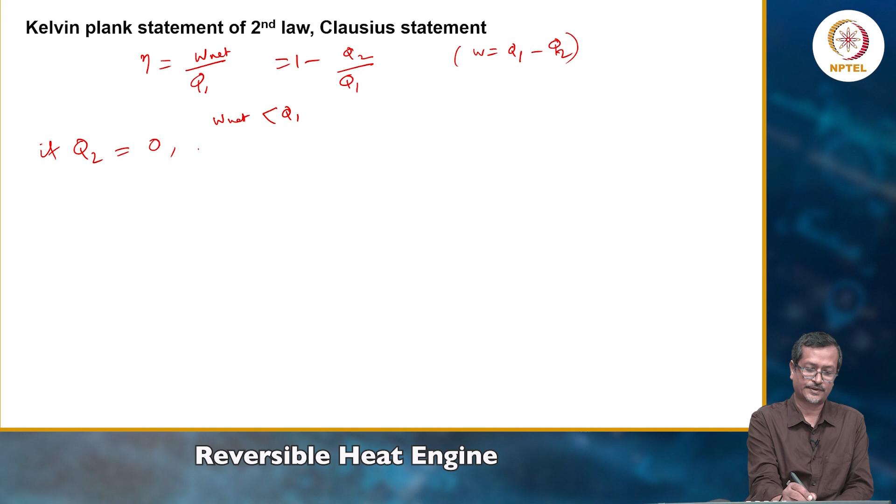So W net is less than Q1. If Q2 equals 0, that is W net equals Q1, that means eta equals 1. So heat energy will produce work violating Kelvin Planck's law. There must be some heat transferred to sink. If there is no heat transfer to sink, that means it is violating Kelvin Planck's statement.

Perpetual motion machine of second kind, PMM2. A PMM2 is impossible, coming from the second law. If the engine exchanges heat with only a single thermal reservoir, only source is there, no sink, then heat supplied is completely converted into an equivalent amount of work. Source, system, sink, and you are getting work. So perpetual motion machine second kind says there is no sink, only source, and work output is there. This is impossible. This kind of machine is known as PMM2.

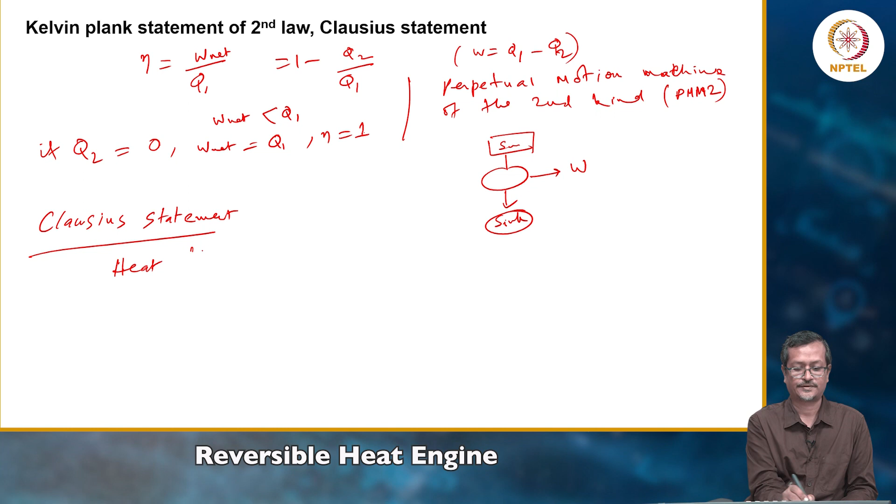Clausius statement: heat always flows from a body at higher temperature to a body at lower temperature. The reverse process never occurs in a system. So Clausius statement: heat flows from higher temperature to lower temperature body, and the reverse flow cannot occur.

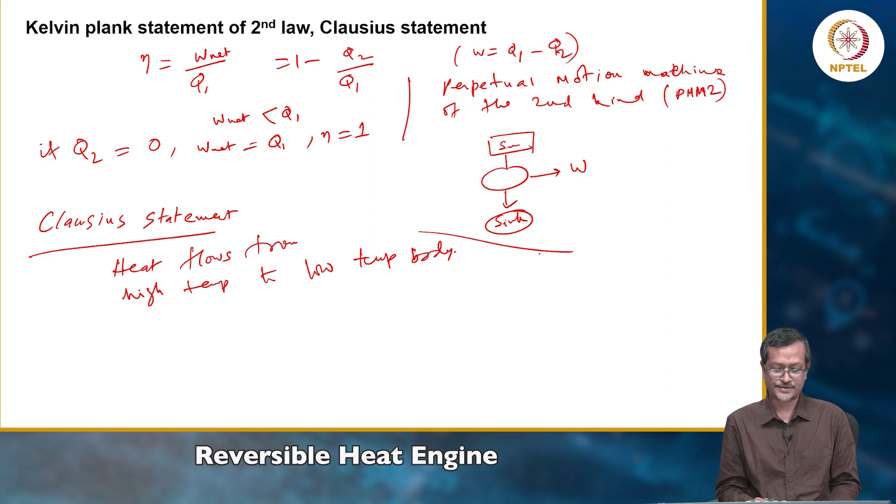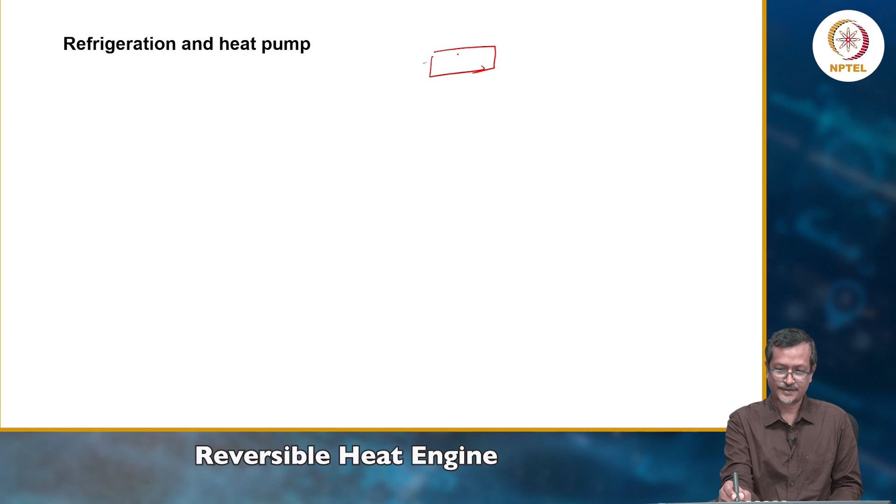Refrigeration and heat pump. First you draw one refrigeration cycle. Details I will discuss later when teaching the refrigeration part. So there will be one compression system, then there will be one evaporator system.

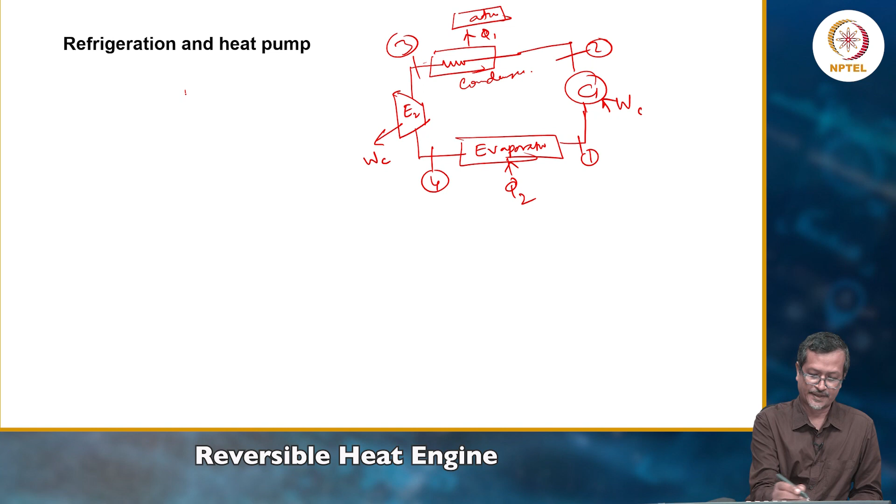This is the compressor we are giving, expander, work coming out, atmosphere, and heat is going to the atmosphere, Q1, evaporator taking T, Q2, this is 1, this is 2, this is 3, this is 4, this is condenser. Our cycle is happening like this: atmosphere, I have one cycle, then I have body A at T2. Q1 is flowing here, Q2 is flowing here, and WE is going out, WC is going in, and the whole cycle is going on.

If I represent it: E, work is going out, C, work is in, and atmosphere, heat is going out, and from the evaporator heat is entering the system. It is just the opposite of your steam cycle. In the steam cycle there was a condenser where heat was going out, a turbine, and a boiler system. So this is just the reverse of your steam engine cycle.

So coefficient of performance, COP. COP is defined as COP equals desired effect divided by work input, equals Q2 divided by W, equals Q2 divided by Q1 minus Q2.

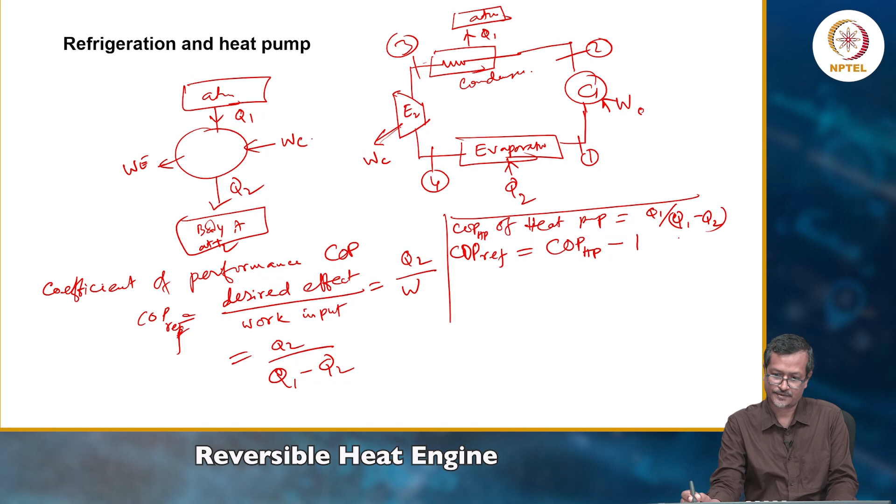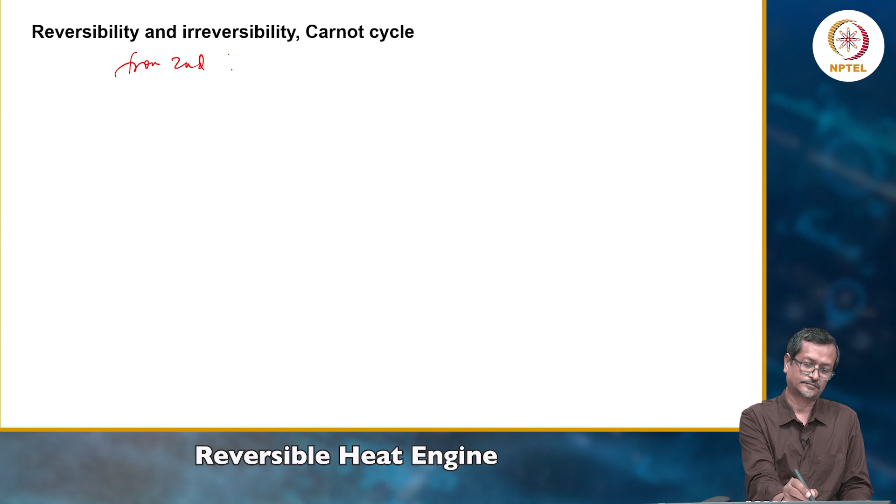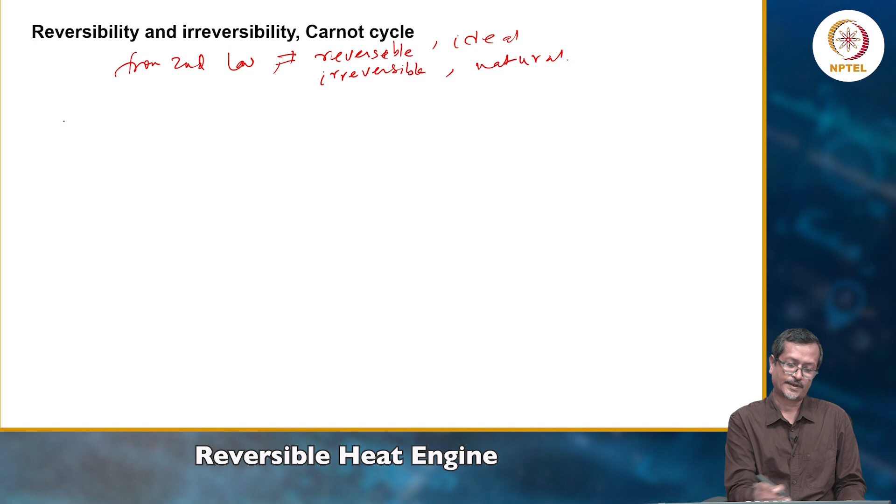Reversibility and irreversibility, Carnot cycle. From the second law, all processes come under reversible ideal process and irreversible natural process. Carnot cycle is a reversible cycle. A reversible cycle is an ideal hypothetical cycle in which all the processes constituting the cycle are reversible. First you draw one piston cylinder arrangement.

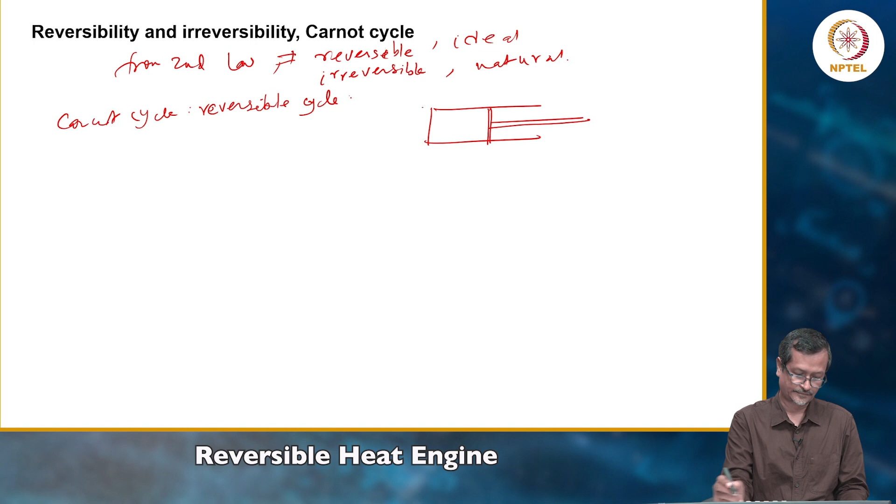Here, this is the diathermic cover, and this is the adiabatic wall. Adiabatic means no heat transfer is allowed, even mass transfer is not allowed. So no heat transfer or energy transfer is allowed. This is piston work, WP out, and the diathermic wall allows heat transfer. Diathermic cover means it allows heat transfer, HT means heat transfer, but not matter. And this is the adiabatic cover.

Source Q1 is going there, and sink T2, Q2. So this is the Carnot engine stationary system.

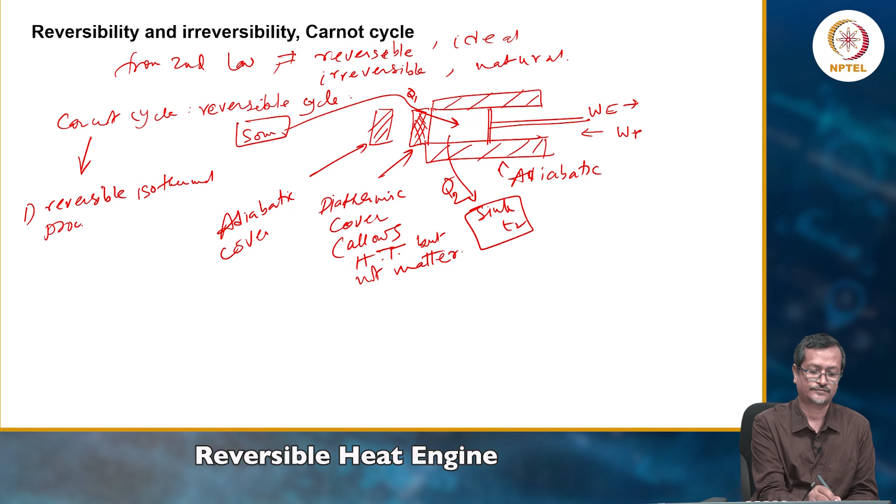The Carnot cycle will have a reversible isothermal process, where from first law it will be Q1 equals U2 minus U1 plus W1 to 2. This is called from first law.

WE is the work done by the system adiabatically. So the first law says 0 equals U3 minus U2 plus W23. So this is the formula W23.

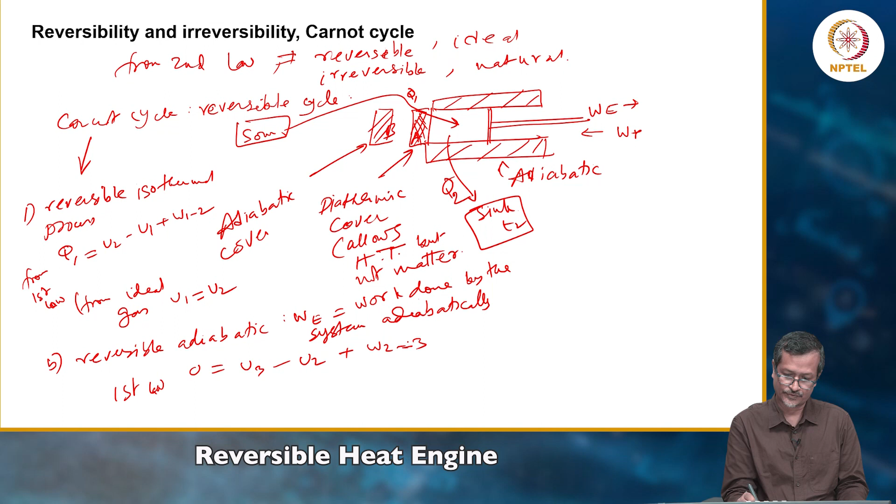A reversible isothermal process, again from first law, it is coming like Q2 equals U4 minus U3, W34.

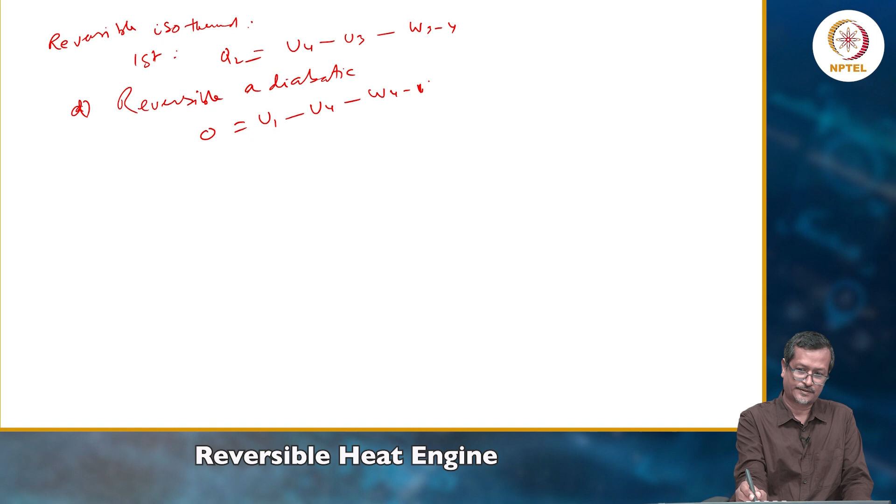This is D, reversible adiabatic process: 0 equals U1 minus U4 minus W41. So we are getting two reversible isothermal and two reversible adiabatic processes.

If I want to plot here, it will be like this, P versus V. So 1, 2, 3, 4 process like this: WP, WE, Q1 and Q2. So I can write 4 to 1, this is reversible adiabatic.

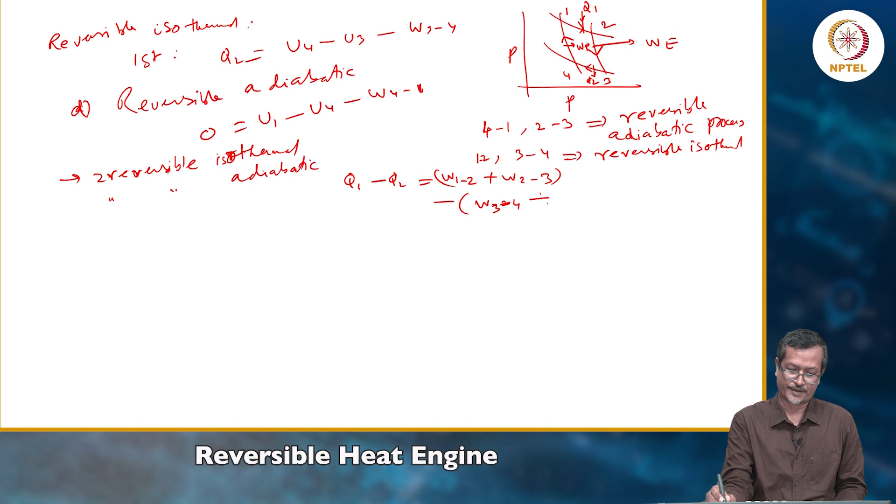1 to 2 and 3 to 4 are reversible isothermal process. So Q1 minus Q2 equals W1 to 2 plus W2 to 3 minus W3 to 4 plus W4 to 1, or summation of Q net cycle equals summation of W net cycle.

A cyclic heat engine operating on the Carnot cycle is called a Carnot heat engine.

Again, in the heat engine, T1 here it is coming as a compression system. So pump or compressor power is giving, and from here turbine WT is coming. This is T1, this is T2 will be coming here, T2, and the cycle will be like this. So continuous flow will be going on.

So pump D, turbine B, this is source is here. So from here Q1 is coming, and T2 sink, Q2 going, temperature T2 sink temperature, this is 4, this is 1, this is 2, this is 3, and fluid is flowing like this. So W net equals WT minus WP equals Q1 minus Q2. This is the Carnot heat engine, a steady flow system.

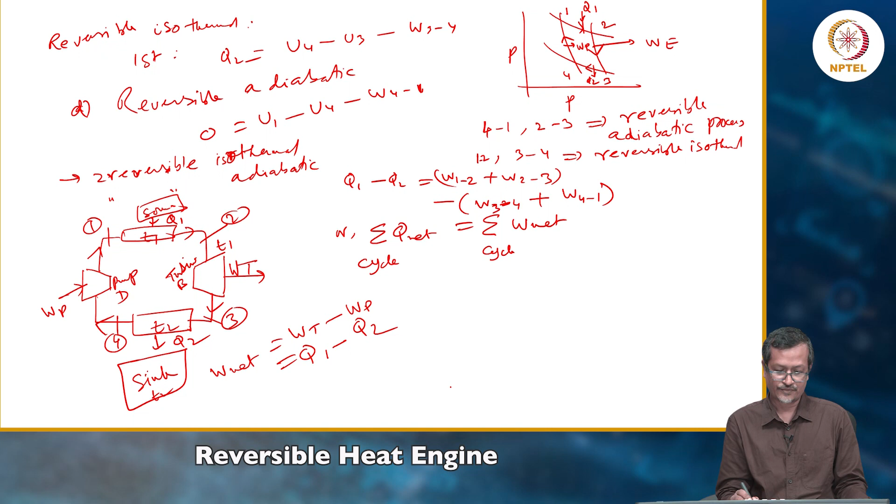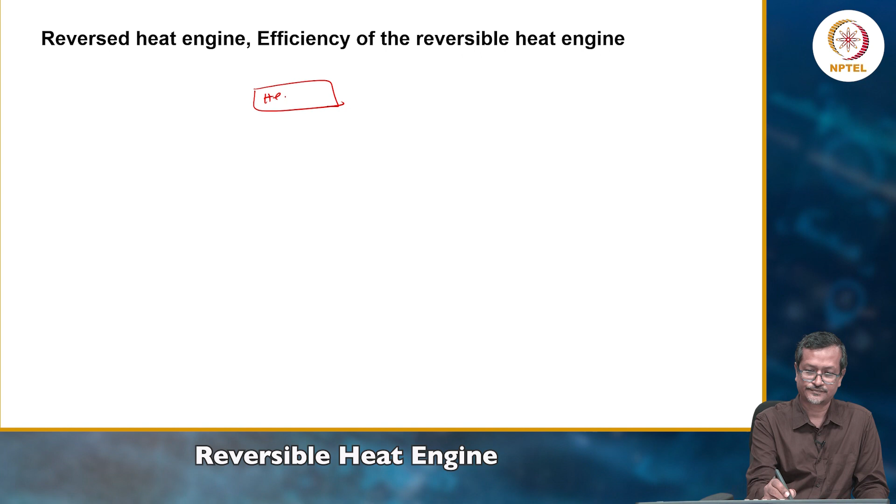So for the reverse heat engine, if I want to draw, first again you draw a heat exchanger. I will discuss details about heat exchanger later. Heat exchanger means it will be releasing heat from the system, or it will be getting heat.

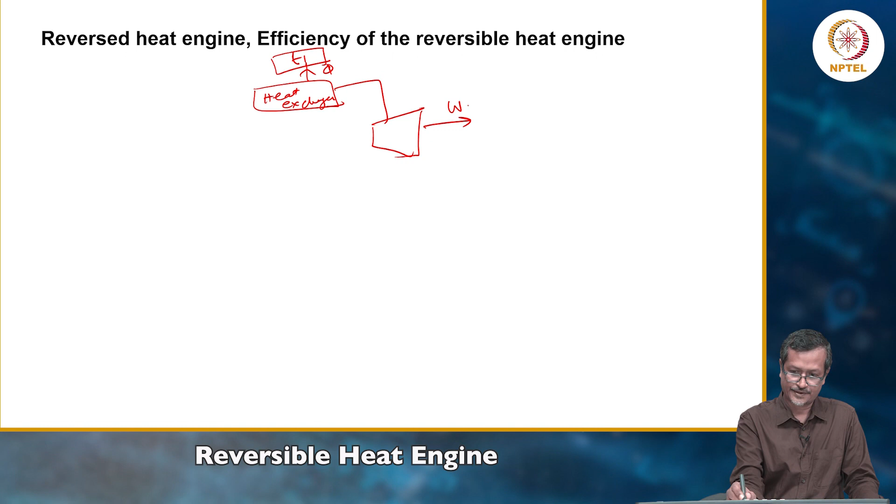So this is T1 and Q1, again turbine is here. So W turbine going out and fluid is flowing like this, and T2 is here, and this cycle again, the same similar cycle I am drawing here. So pump...

When you are talking about refrigeration, or when you are talking about heat engine, like a thermal power plant, the case will be just opposite. Q2, T2, from T2 you are taking heat and you are supplying the system, but in the other case it was just opposite. So the reversed heat engine is called the refrigeration cycle.

So the efficiency of the reversible heat engine, eta reversible, equals eta maximum possible. Carnot engine will be giving maximum efficiency. No engine can have more efficiency than Carnot efficiency: 1 minus Q2 by Q1 reversible.

If it is irreversible, then there will be much more losses: 1 minus T2 by T1, so eta reversible equals T1 minus T2 divided by T1. So this is the formula.

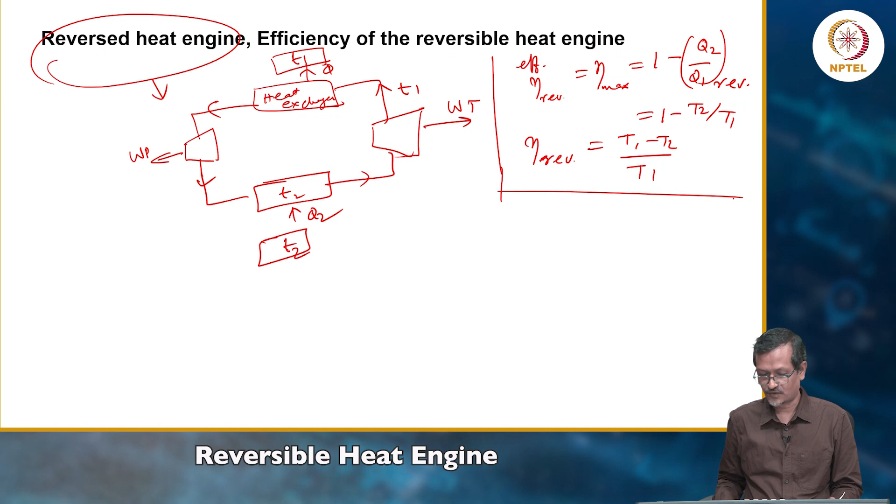So Carnot engine will have the highest efficiency. You cannot get more efficiency than the Carnot cycle. Other practical systems will have lesser efficiency because there will be several other losses. Carnot cycle assumes everything is reversible. So the entropy concept is coming from the second law.

So thermodynamics is the study of three E's: energy, equilibrium, and entropy.

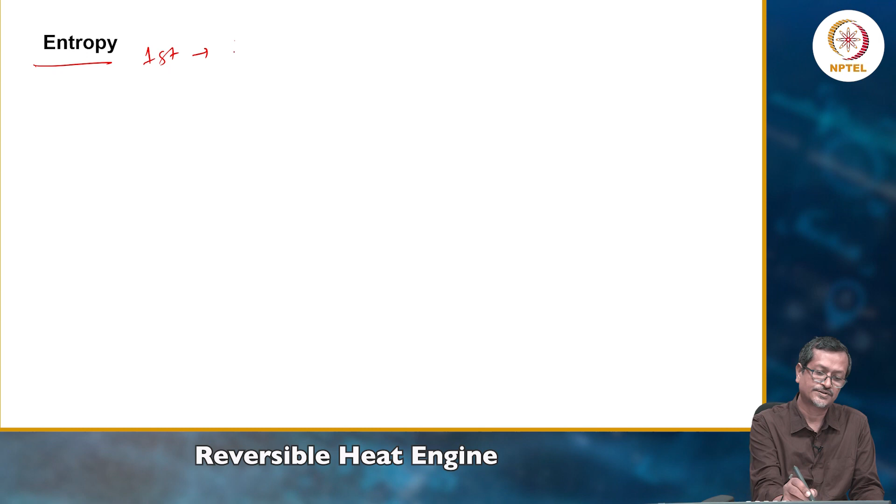First law says law of internal energy. Second law is the entropy concept; it will give, because it will say losses. So when losses are there, entropy will be increasing.

So property of entropy: let us say PV diagram, and two processes are there, initial stage, final stage, R1 reversible, and going back to I again, R2. So two reversible paths R1, R2 between two equilibrium states I and F. From Clausius theorem, R1 reversible process,

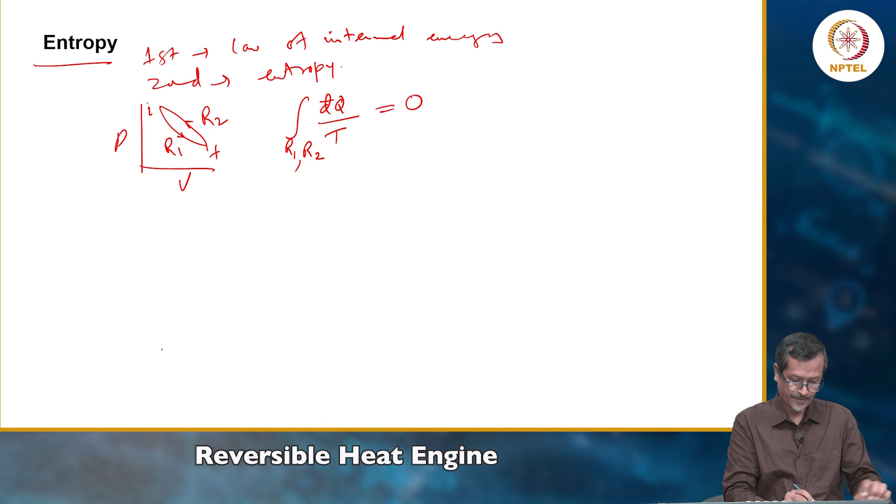dq by T equals 0. This can be replaced by integrating R1 I to F dq by T, plus dq by T for R2 F to I, because it's a cyclic process, equals 0. Or I can write integration of dq by T, I to F along R1, equals minus dq by T along R2, F to I.

Since R2 is reversible, I to F should be F to I. Since R2 is reversible, R1 I to F dq by T equals R2 I to F dq by T.

This property is called entropy. So SF minus SI equals integral I to F dq by T, or dS equals dq reversible by T, when two equilibrium states are infinitesimally near.

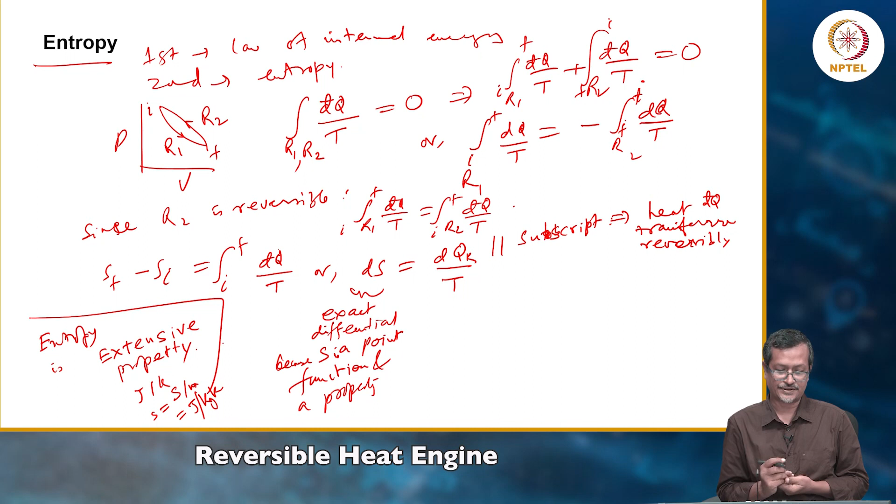Now we will solve two problems. Problem 6: the cyclic heat engine operates between a source temperature of 800 degrees and sink temperature of 30 degrees. The least rate of heat rejection per kilowatt net output of the engine is to be found.

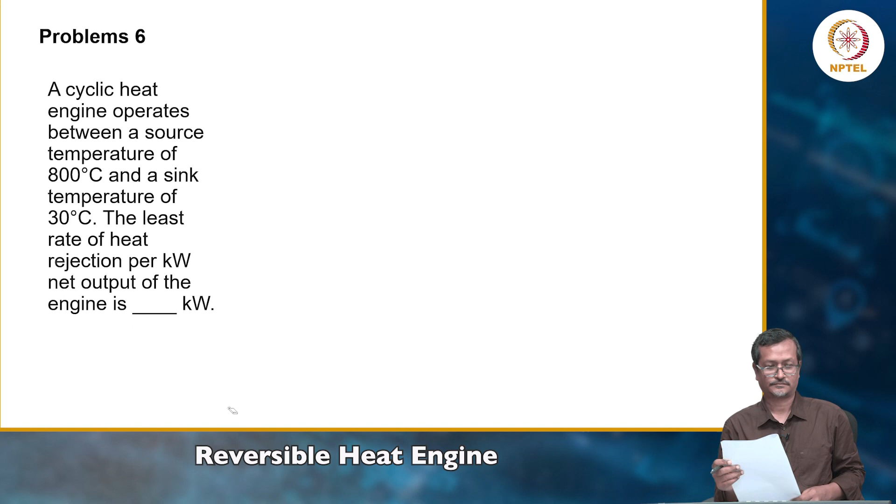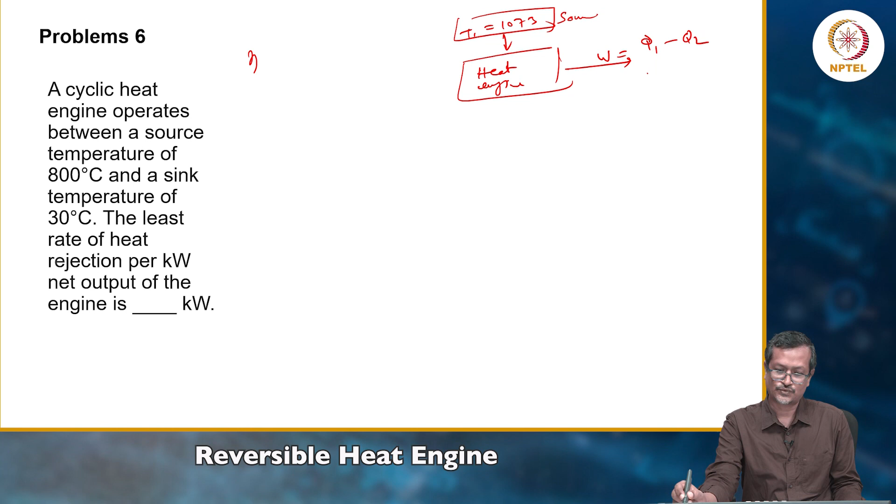So eta max, first you draw the figure of the heat engine. T1 equals 1073, this is source. And W equals Q1 minus Q2, 1 kilowatt, and Q2 is sink, T2 equals 303 Kelvin.

Now eta max equals eta reversible process equals 1 minus T2 by T1. So 1 minus (30 plus 273) by (800 plus 273) equals 0.718. So 71%, 72% efficiency.

Now net work output by input heat equals eta max. Q1 equals 1 by 0.718 equals 1.392 kilowatt. So Q2 equals Q1 minus W net equals 1.392 minus 1 equals 0.392 kilowatt. So this is the least rate of heat rejection.

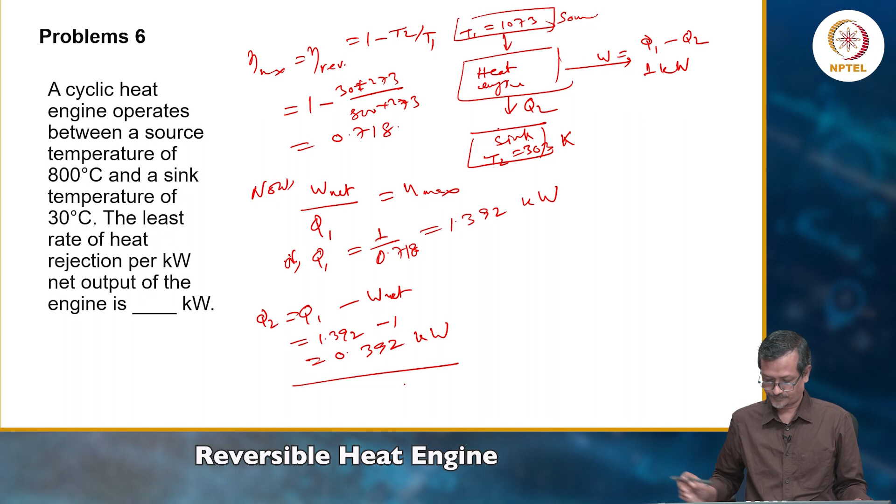Another problem: a solar collector absorbs 1880 kilojoules per meter square of energy when the plate operates at 90 degrees centigrade and transfers energy as heat to the fluid within a heat engine. The engine rejects heat to atmosphere. The minimum collector area required to produce 1 kilowatt of useful shaft power is to be found. Assume atmospheric temperature 20 degrees.

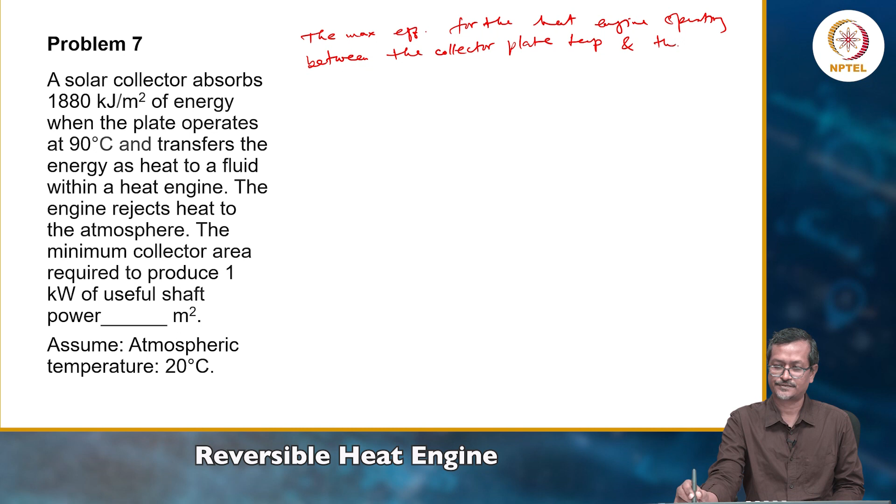So the efficiency of the reversible heat engine, the maximum efficiency for the heat engine, between the collector plate temperature and the atmospheric temperature is eta max equals 1 minus T2 by T1 equals 1 minus 293 by 363 equals 0.192, where T1 is 273 plus 90 equals 363 K, and T2 equals 273 plus 20 equals 293 K.

The efficiency of any actual heat engine operating between these temperatures would be this efficiency at most. So Q min: W by eta max equals 1 kJ per second by 0.192 equals 5.21... giving 5.21 kJ per second.